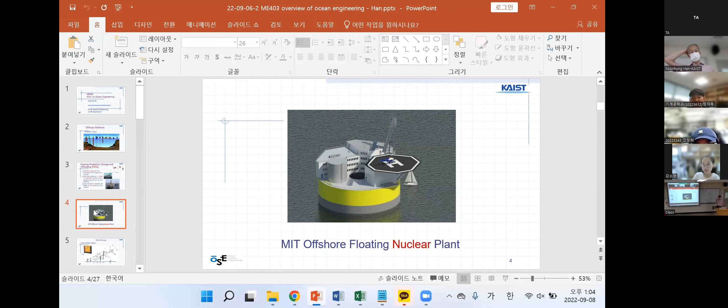And this one is just an idea sketch coming from MIT about floating. Now it is about wind power system.

Wind power is getting bigger. When was it? 1980, 40 years ago, it was about 50 kilowatts, and diameter is 15 meters. 15 meters can be 3 floors height of a building, right?

But now it's growing, 10 years ago already it is 10 megawatts of electricity, and the diameter is 180 meters. So it can be a big ship in terms of length. And in terms of building, how many floors can we expect? Let's say divide by 5, then it can be 36 floors. Very big building is rotating.

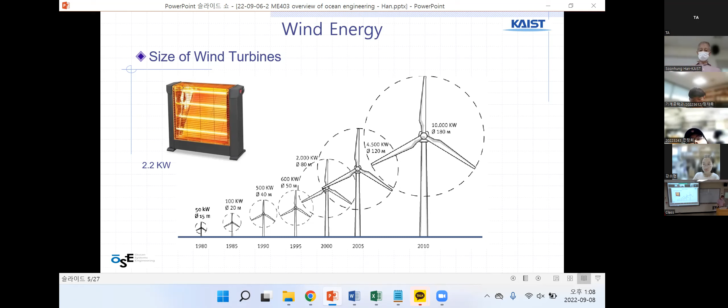There are items we need to understand about this, the trend of wind energy systems. It started as land-fixed type and small size. Enercon was 6 megawatts in Germany, probably the biggest one that was land-based.

And then it moves on to shallow water, bottom fixed, similar to offshore plants. And nowadays they are moving deeper and farther from land, so it becomes something like floating wind, and bigger. So the merit, advantage and disadvantage, is simpler and safer, probably especially for operation and maintenance.

This is good, but the problem is noise. I have one experience, not in this building, I was in another building, my office. We call it the Eureka building, named that because the ocean engineering department was there. It was on the 7th floor, this one is 6th floor. We had a research R&D project about wind power systems at the time, 10 years ago.

So one professor bought a small wind power system for research purposes, not for producing or selling electricity. It was small, like a 2 or 3 meter diameter blade, and we installed that wind power system on top of the building because the wind is good there, 7th floor, top of the building, and the space is good. But we had to take it out after a few months because of the noise.

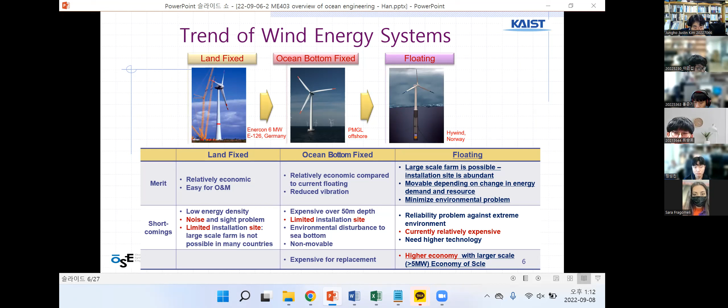So there is an advantage and disadvantage, you'll see more at a later stage. This is, I guess, a sketch of a mobile harbor, a floating port, and there was a project about mobile harbor in KAIST. This is an output of the KAIST research from about 15 years ago.

And TEU is a unit for counting containers. Do you know what TEU means? Have you seen container boxes being transported on the roadside by truck? No? You've never seen a container moving on the road by car? No chance? Then how do you know the container is being moved?

Train also carries cargo, but finally you need to carry by truck, one by one. One container, one truck, moving to the final destination.

As I told you before, I was moving from the United States to Korea, including my car there. My total amount of moving was 2/3 of a container, not a full container. So for the collecting company, they put another cargo to pack the container box full. Anyway, that container box should be delivered to Korea, and then I somehow got my household goods and car delivered.

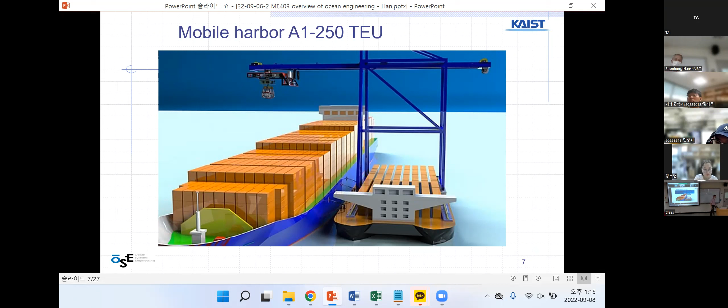Otherwise, if there's a mixture of 10, 30, 50, you can't pack clearly, right? So it's popular to use 20 or 40, so you can mix both loading and unloading. This ship can handle up to 250 boxes. This picture is from a port handling containers - to me it looks like a 40-foot container.

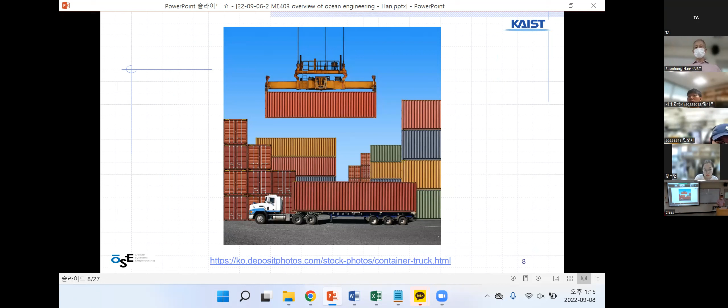And then, oh, here's a video. See this.

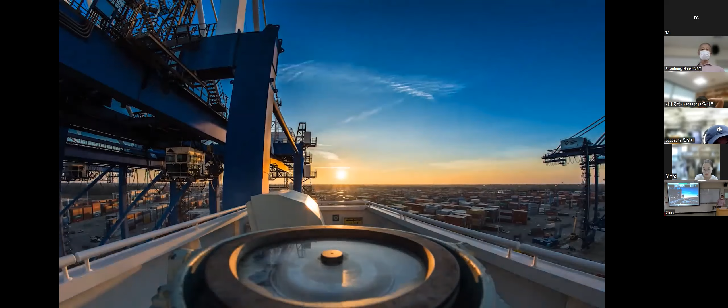Let me show you how containers work. It's possible that most things around you right now came from a container ship - the food you ate, the phone or computer you're looking at. We have anything from apples to frozen meat to explosive or toxic gases on the ship. Some of the things we carry is pretty bizarre.

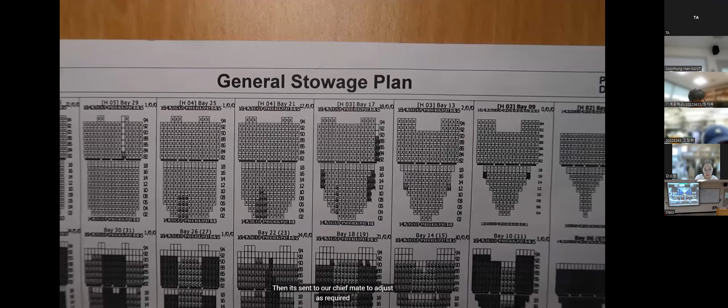But everything actually begins in the office with a team of people we call central planners. They draw up the cargo plan for the whole supply chain, then it's sent to a chief mate to adjust as required. The containers are loaded by the port's crane.

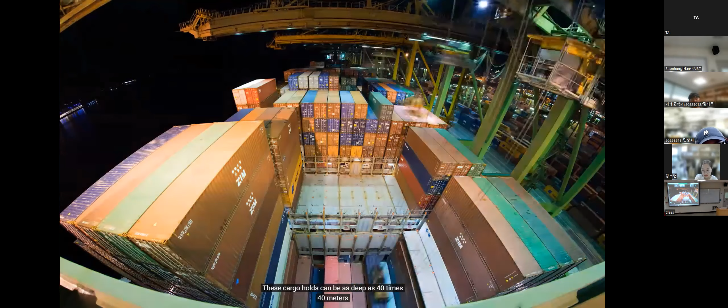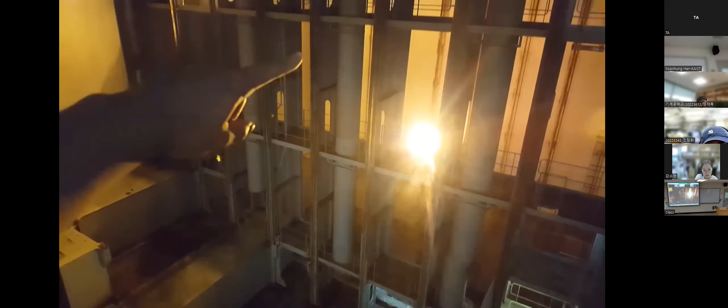Starting from the bottom, stacking up like Legos. These cargo holds can be as deep as 40 by 40 meters. The bays are built with long cell guides that run downwards, which secure the containers in place. And this is what an empty container hold looks like.

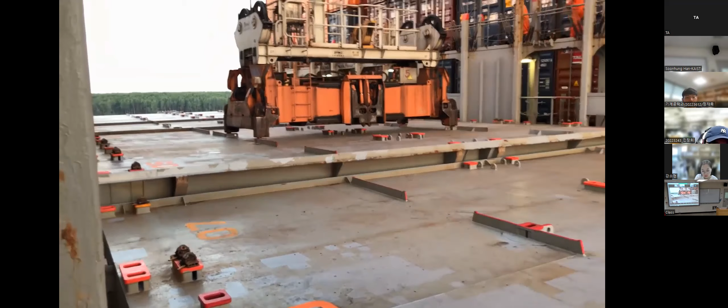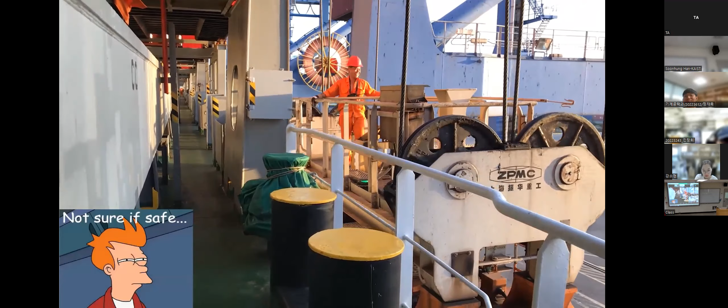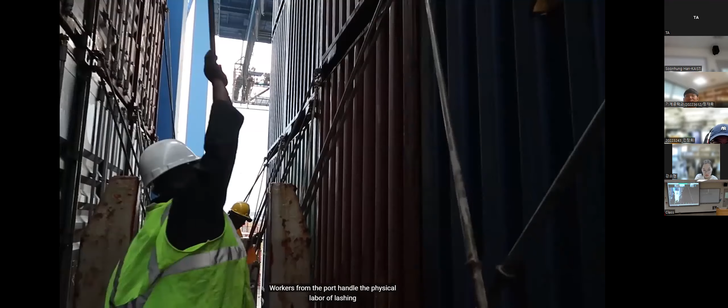Once it's filled, a hatch cover is placed on top so more containers can be loaded. The ones above on deck need extra lashings to secure them. Workers from the port handle the physical labor of lashing - thank god, because these full metal rods are very, very heavy.

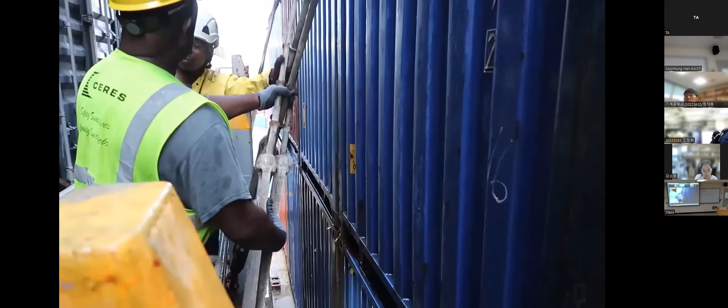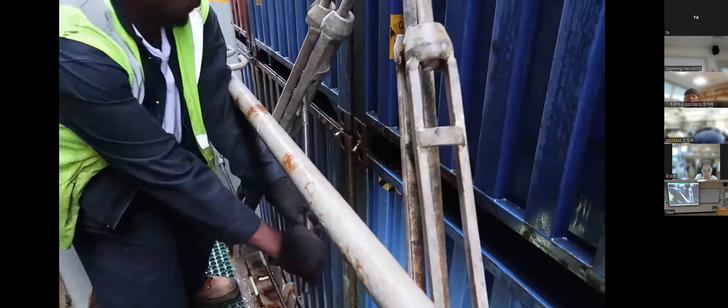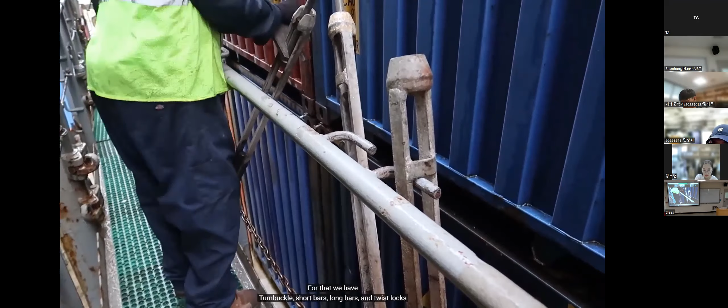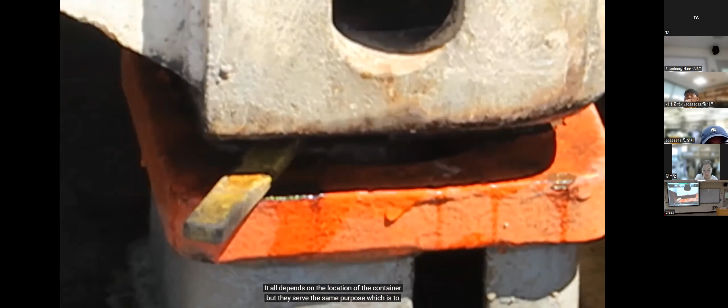Turnbuckles are twisted to tighten the steel rods. For that we have turnbuckles, short bars, long bars, and twist locks. There are actually a few types of twist locks on our ship - some are manual, some are automatic. It all depends on the location of the containers, but they serve the same purpose, which is to lock containers.

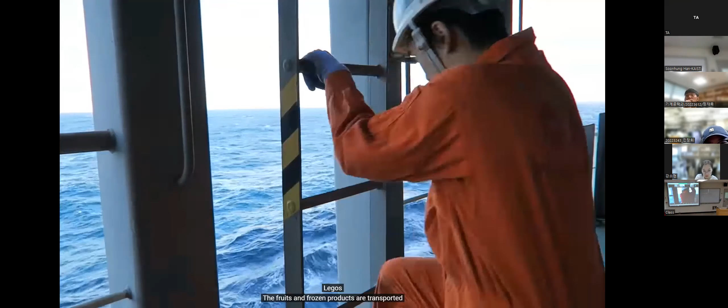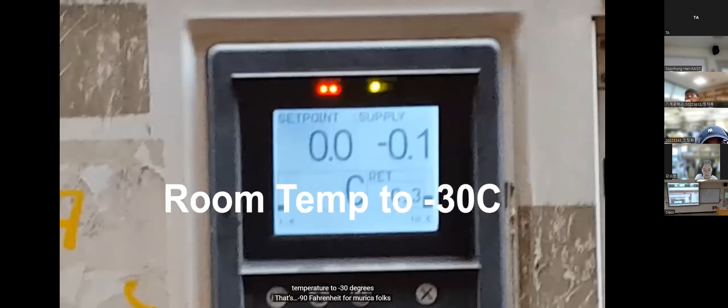Once again, it really is just like stacking Legos. The fruits and frozen products are transported by reefers, short for refrigerated containers - they're pretty much a gigantic portable fridge. It can keep temperatures anywhere from room temperature to negative 30 degrees, that's negative 90 Fahrenheit for American folks.

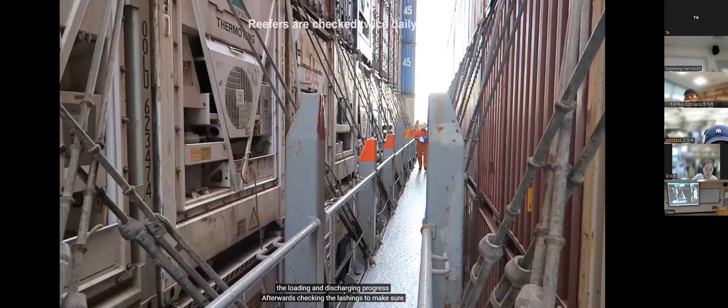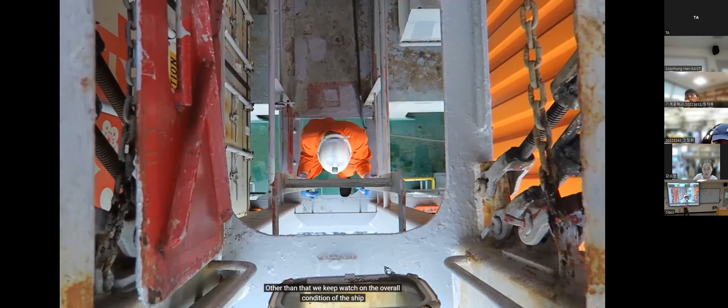So what's my part in all this? Well, as third mate, my job during cargo operations is to monitor the loading and discharging progress. Afterwards, checking the lashing to make sure it's done properly - the last thing we want is containers falling into the sea if we run into bad weather. Other than that, we keep watch on the overall condition of the ship, including safety and security, checking the mooring lines and looking out for any suspicious activities like stowaways or pirates.

So that was a general overview of how cargo operations are done on container ships. If you have any specific questions...

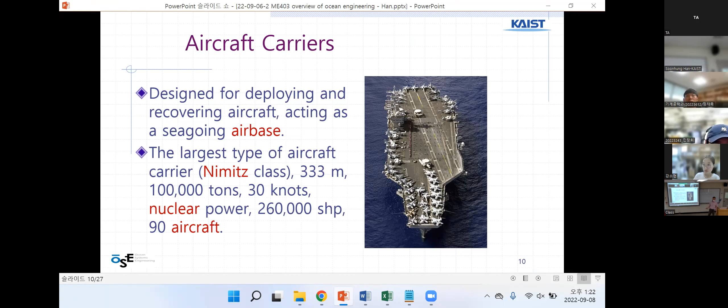If you convert this into a diesel engine, you need over 80,000 horsepower, so it should be nuclear. And it carries 90 aircraft. Our range - I already helped you with that conversion between horsepower and watts. This one is 2 kilowatts at home, and large wind power grows into 10 megawatts nowadays - I should correct this one - and the commercial nuclear power plant is bigger.

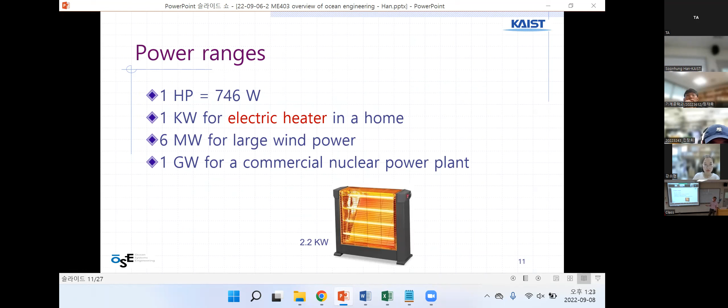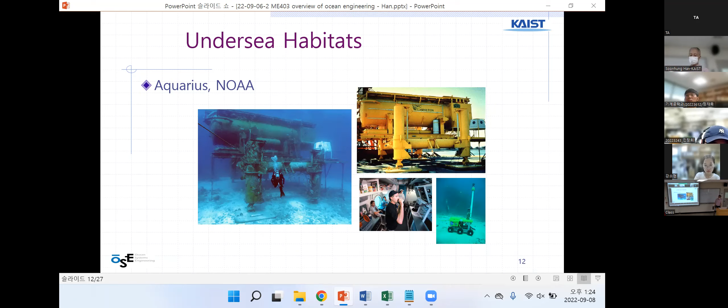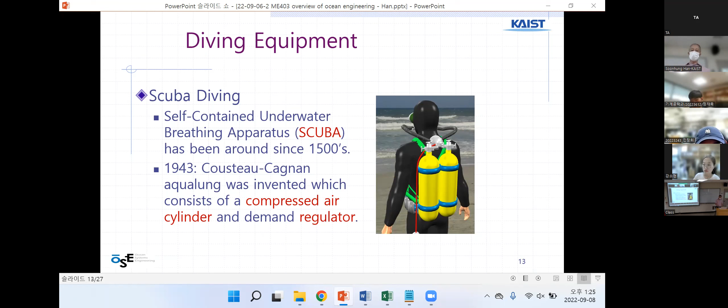The key element is compressed air cylinder and regulator. And then the diving bell.

For Koreans, the diving bell is very famous because of several cases. In old days, classically, there was only the bell, long time ago. It's famous because there was a disaster, 8 years ago, and more than 300 people died because of a ship. After that, there were many tries to save them or find out what happened.

So some people said that we need to use diving equipment, but the government did not use that diving equipment. So there was a big debate.

That's why many times on TV and radio they talked about diving bell. Diving bell is not popular to you, right? I've seen it in videos. Also, there was a film about it.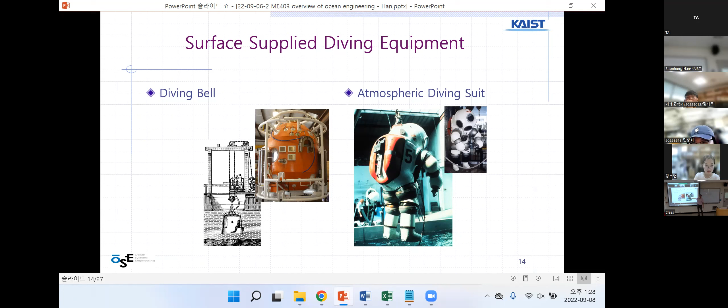Classification of ocean vehicles or ships: surface vessel - this is the very popular one, the manned surface ship. Nowadays unmanned surface ships are more popular too. Small size underwater vehicles include submarines and submersibles, but there's also an increasing number of unmanned underwater vehicles. And others - this is a very special one.

We call this a WIG, wing in ground effect ship. It looks like an airplane, but they fly very close to the surface, only several meters. It's good for lifting because of the ground effect, or aerodynamics. It's economical for lifting heavy cargoes - cheaper than normal.

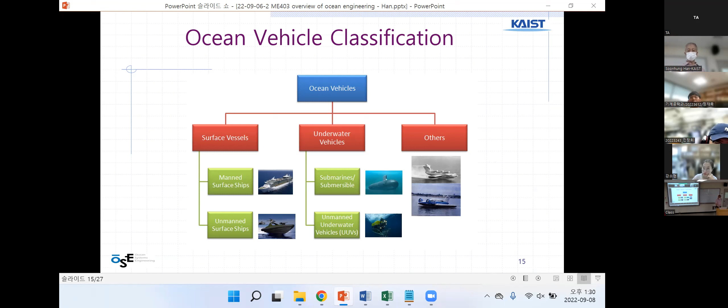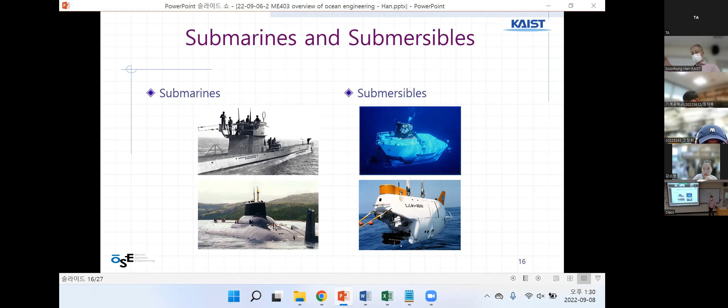Submarine and submersible: the submarine is usually for the Navy. The submersible is a small one, but built for deeper size, for scientific investigation - something like 6,000 to 10,000 meters, 10 kilometers deep. We need special small size video cameras, sensors, and also an artificial hand.

Robotics, two kinds: one is ROV, the other is AUV. ROV is remotely operated vehicle, short name. AUV is autonomous underwater vehicle. The difference is there is a cable to the ship for the ROV. This one, the AUV, has no cable, so it needs to be battery operated.

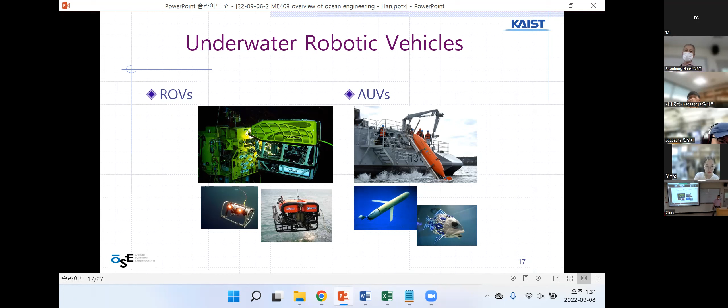There is a battery, and there is no battery for the ROV since it uses a power cable. The cable has the function of providing electricity and also communication - meaning control and sensing - because underwater it is not easy to have communication. So the division between the two is very clear. We call it an umbilical cable connection.

Now we are moving toward the unmanned ship. There is a lot of R&D going on nowadays to build the first unmanned ships. The appearance is different because there is no superstructure or hotel on top of the ship. Usually the ship has a hotel-like structure where the captain is located at the top floor, the pilot house. The unmanned ship has no such structure, so it can look like a submarine. We need to have some kind of observation camera and communication equipment, so it looks like a submarine port.

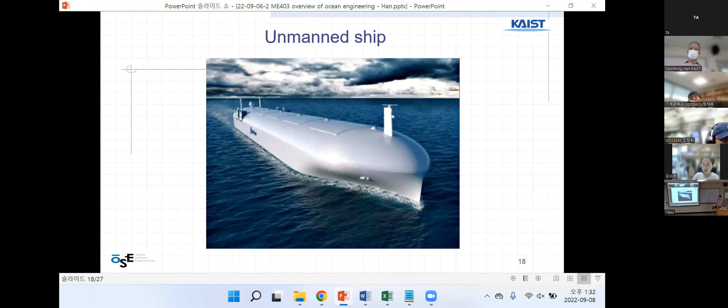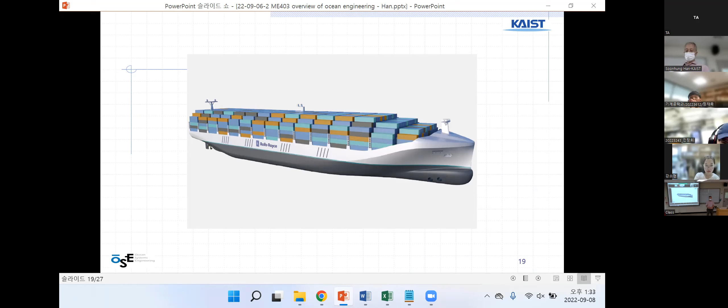This is also an idea sketch of a container ship, or unmanned container ship. The idea sketch came from Norway - I heard there is a small one operating near the Norway Sea, in a fjord, something like this, a small unmanned vessel. They have already built a small one and are testing it, and this is the communication aspect.